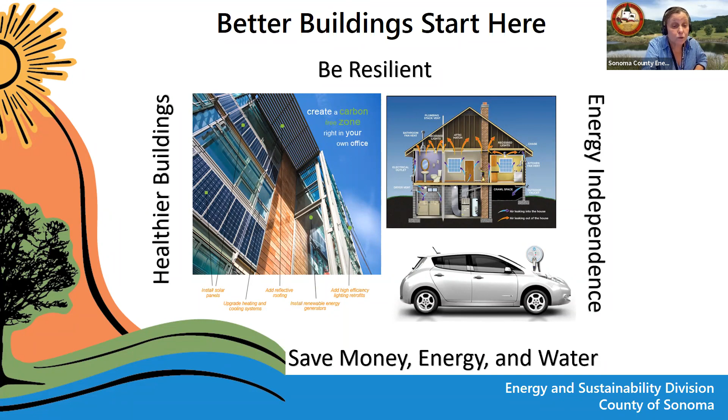We assist county residents through a variety of services and programs. We work with cities, towns, special districts, and businesses and residents to increase energy efficiency and resilience in their buildings through energy and resiliency retrofit project planning, rebates, and financing.

We offer the county's PACE financing program to property owners for energy, water, solar, battery backup, wildfire safety, and seismic strengthening improvements. We offer no-cost consultation services where we provide impartial information to educate community members so they can make informed decisions related to building improvements. And we provide project planning services to help identify resources such as incentives, rebates, and financing to get projects done. We host numerous workshops and trainings for the community and contractors for workforce development, and we also partner with a variety of agencies to offer programs and services to the community.

Today we're going to talk about actions that property owners can take to reduce the vulnerability of buildings during earthquakes and wildfires, with strategies for home hardening and seismic strengthening.

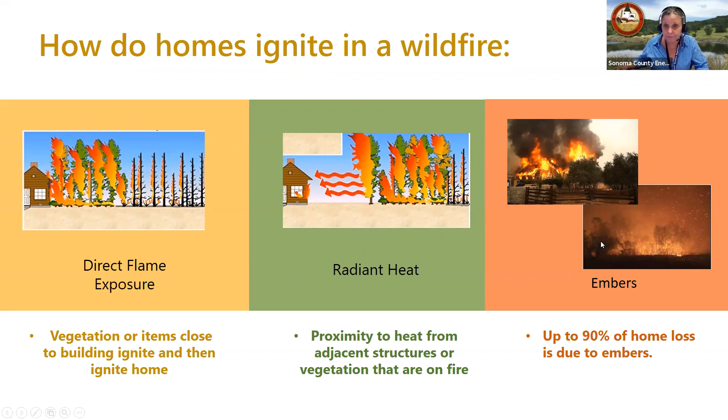Some of the ways that we can harden the home and create a safer environment and protect our homes: first, we want to look at vulnerabilities on the structure itself and harden the structure to prevent ignition. We want to look at fuels within 100 feet surrounding the home and create defensible space. And then we want to really pay attention to weather. It's important to avoid mowing or doing yard work when there are red flag warnings or high wind and high temperature advisories. Always avoid mowing after 10 a.m., or never on a hot and windy day.

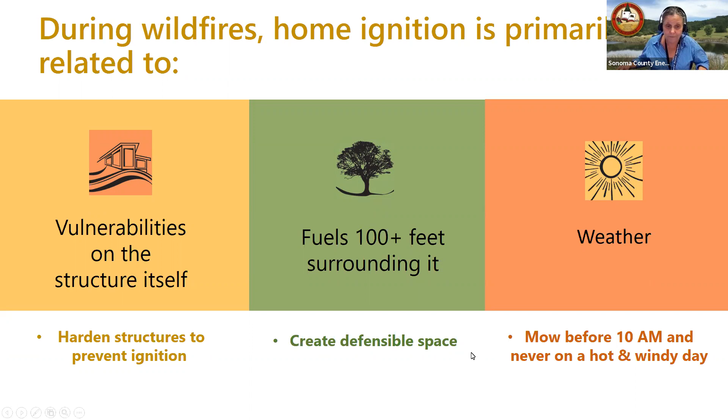This image is one of many from wildfire home retrofit guides showing the critical ember-resistant zone closest to the structure. In this guide, it's referred to as zone 0. Other guides refer to this as zone 1, but I like the zone 0 reference because it shows that it's the most critical area, and the area we have the most control over. So in this area, we want to reduce the vulnerability of the home by creating a zone of ember-resistant materials around the home.

We want to harden the structure. Hardscape is commonly used in this zone, and the zone includes areas under and around attached decks. We want to keep this area clear of any wood piles, wood mulch, and flammable vegetation and stuff. Stuff is a really important consideration—anything flammable in this zone is not recommended, particularly during red flag warnings and high temperature events. This is when you really want to consider clearing these combustible items out of this zone 0.

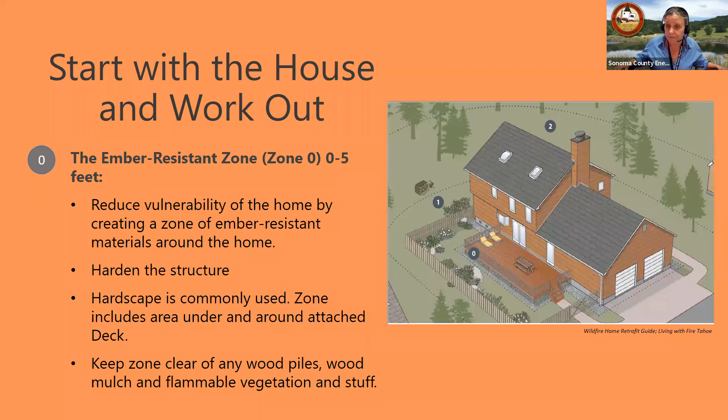Here is a list of high priority areas to focus on for home hardening. Because embers are the primary source of ignition during a wildfire for homes, our priority is to focus on horizontal surfaces and areas prone to accumulation of combustible debris. These areas include the roof and roof edge, vents, vegetation and defensible space, windows and doors, decks, patios and porches, and siding.

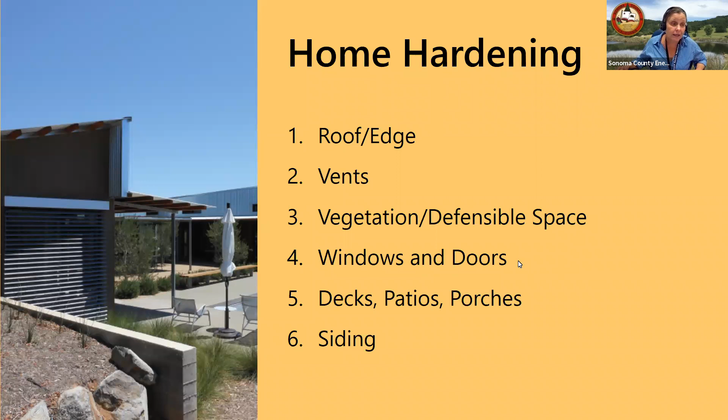The first area we're going to talk about is home hardening at the roof. The roof covering and edge are the most vulnerable part of the home. Because of its large flat surface, the roof has the most severe exposure to wildfire embers, and it's the area most prone to accumulation of combustible debris. In this image, you can see where the horizontal or sloped plane meets the vertical siding—there's combustible siding, whether or not the roof surface is fire-resistant, and leaf debris and leaf litter accumulating next to the siding. That siding looks like wood, combustible siding. This can be a real problem, a real vulnerable area during a wildfire event, particularly because of flying embers.

The important point here is it doesn't always take a major retrofit to harden your home. All of this combustible debris is something we can take care of on an ongoing basis. It generally takes climbing on a ladder, but it's really important to take care of these no-cost, low-hanging fruit opportunities.

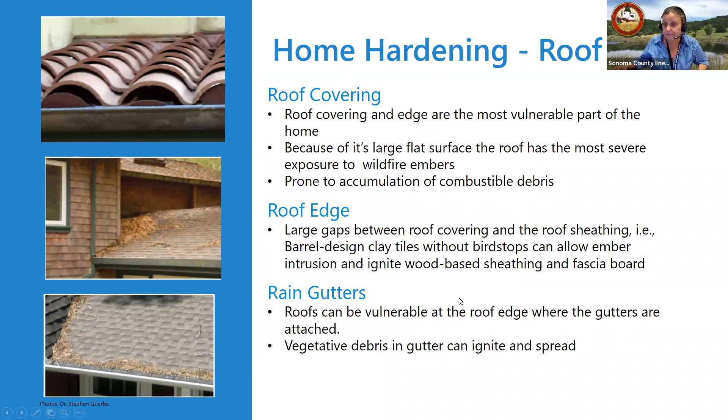So how we can reduce the vulnerability of roofs: number one, remove vegetative debris from the roof, inspect and maintain and replace roofs in poor condition, and replace wood shake or older shingle roofs with Class A roofing. A Class A roof is a roof surface designed to withstand a burning box of wood for 1 hour before burning through. That's what the Class A distinction represents.

Some examples of Class A roofing include asphalt fiberglass composition shingles, clay tiles, cementitious tiles, and metal roofing when it is in a system that has the proper underlayment and ridge caps, which must be installed to avoid fuel accumulation.

It's also important to block openings if there's a space between the roofing material and the roof deck, and inspect the roof edge to see that the metal drip edge is installed to cover the plywood roof deck edge. You can visually inspect this. It's required for new construction, but older homes can often be missing this metal drip edge on the roof surface, so it's something to take a look at—that's a vulnerable area.

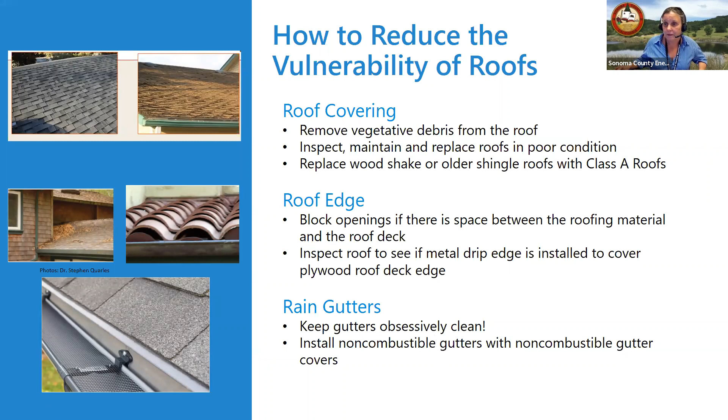The next area we're going to talk about is vents: under eave, attic, and foundation vents. Open eave construction is very vulnerable with or without vents, illustrated in the top left image, where flying embers can get caught underneath that area and cause issues.

1/4-inch vent screens are very common, and embers large enough to pass through a 1/4-inch screen can ignite fine fuels. Often folks store things in their attic and sometimes in their crawl space, which can make your home more vulnerable—that's something to pay attention to.

Gable end vents are more vulnerable to wind-blown embers—an example is the top right image. Foundation or crawl space vents are also vulnerable to ember intrusion. You can see the lower image of a crawl space vent with combustible debris right below it, which can be very problematic. That's an area to pay attention to.

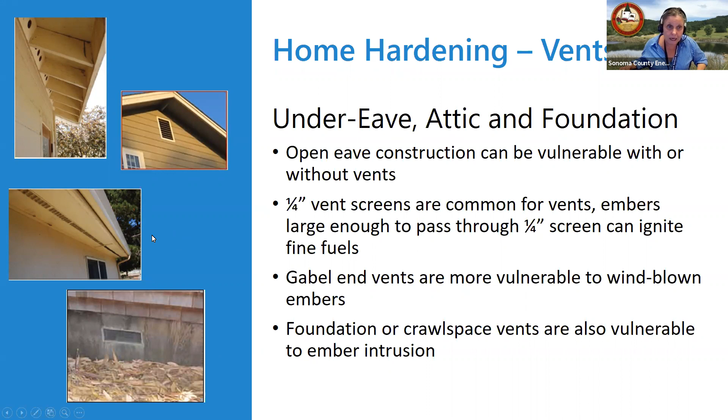Here are some ways we can reduce the vulnerability of vents in our home. We can opt for soffitted eave design for under eave inlet vents, looking at enclosed soffitted eaves. Install 1/16 inch to 1/8 inch mesh over vents to help prevent larger embers from intruding. You want to pay attention to the airflow required in those areas—leave enough net free air area in the grills for moisture mitigation in crawl spaces and attics, but definitely look at reducing the size of the mesh over your vents.

Install ember resistant gable end vents, and invest in ember and flame resistant wildland urban interface rated vents. The state fire marshal has a website of materials where they list WUI rated vents, and that link is included in the slide with wildfire safety resources—a good reference tool for finding vents that qualify under this category.

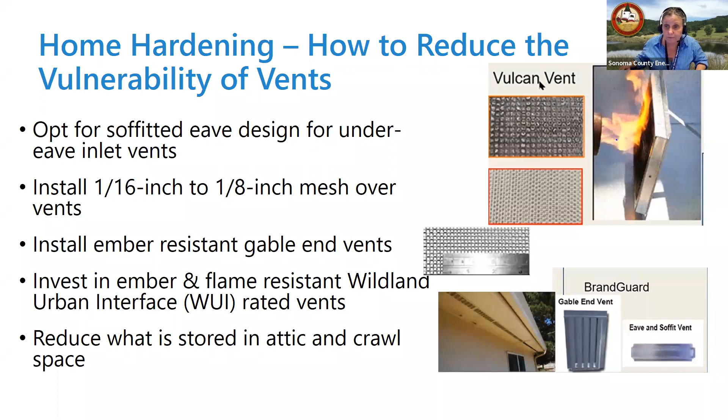So, how to reduce the vulnerability in the 0 to 5 foot zone—this is the area in close proximity to your home, that zone 0 we were talking about. One issue is combustible stuff, including deck furniture, wooden ladders, brooms, and wooden tools. You can see one image on the right-hand side has a pitchfork and what used to be a broom that caught fire when an ember landed on it. Luckily this home survived, but you can see that was actually a problem.

Any kind of combustible wood materials should be moved out of this critical zone to eliminate this vulnerability. You can see all sorts of examples of combustible stuff, right? Wood piles, those coir rug entry mats, and then there's a dog coming out of a pet door. That can be a problem when the wind is blowing.

You can have problems with ember intrusion, but it's also really important to think about if you're evacuated or there's red flag warnings, to close up those pet doors because they can flap open and be a problem. Wood piles should be stored 30 feet away from buildings, or stored inside, or covered with a non-flammable tarp.

Propane tanks ideally should be 30 feet away from the home with a 10-foot non-combustible zone around the tank, or the tank can be enclosed in a non-combustible enclosure, for example like CMU block or something like that. But it's really something to pay attention to.

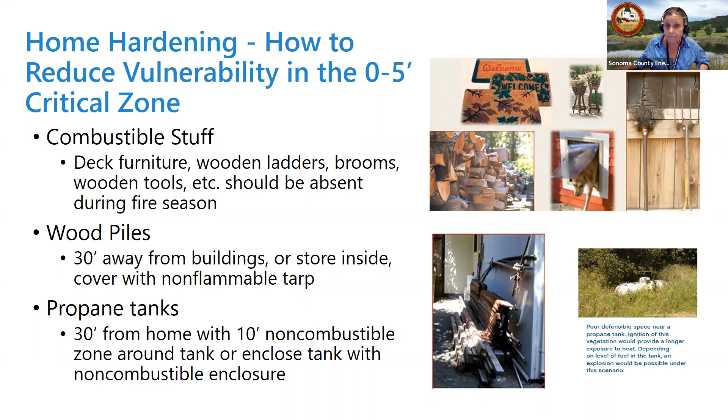So in this zone, we want to remove woody plants. And if you're going to plant at all, think about fire resistant plant materials. We have also some information about plant selection in this area in our slides towards the end. And remove vegetation within 5 feet of windows and glass doors.

They represent a vulnerability in the home's surface, so having flammable vegetation in this zone is a bad idea. Also use non-combustible mulch in this area. We want to avoid combustible wood, bark, and rubber mulch products.

Rubber is a real problematic material if it ignites. It may take a little longer to ignite, but once it does, it puts off a lot of really noxious fumes, makes it very difficult for firefighters to be in proximity to it when it's ignited. And it's very difficult to extinguish the fire with rubber mulch, so it's not a good idea in zone 0.

Don't install small pieces of bark or very combustible gorilla hair mulch in this zone. And in walkways and hardscaping areas around the home, use pavers, rock mulch, or pea gravel.

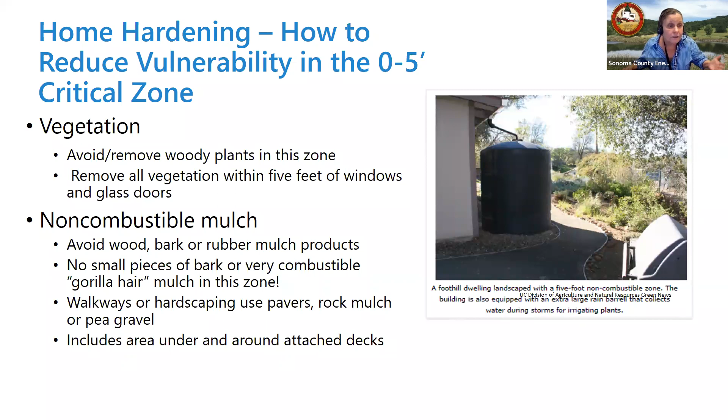So I thought this was a really good example of how to manage that area in close proximity to the home. This area includes, as I mentioned before, areas under and around attached decks, so gravel under and around attached decks, or some other type of non-combustible material, is a really good idea.

Here we've got another element in the 0 to 5 foot critical zone: fences. Attached fences that come right up to the home. A really good practice is to replace the combustible portion of your fence that meets the home, that actually leads up to the home, with a non-combustible fence. Here we want a minimum of a 5 to 10 foot long non-combustible section.

A horrible example is this top picture, that scary example that shows the fire wicking along the wooden fence and then actually reaching the home. But really good examples on the bottom, where a metal fence is acting as a fire break between that combustible wooden fence - very common to have wooden fences - but it can really help mitigate that fire spread.

And here again, you want to remove vegetative debris. We want to diligently remove vegetative debris anywhere around our homes - that's a really important practice. But you want to look at the base of your combustible fence and also keep that clear of combustible debris.

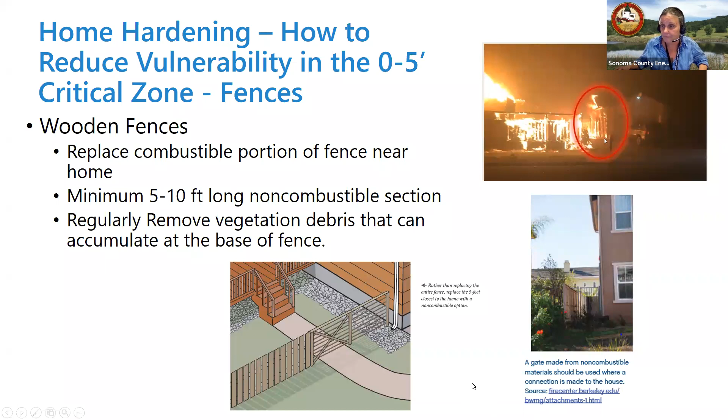Another area we're going to talk about is windows and doors. Windows and glass doors can be vulnerable if the framing material ignites, and if glass breaks or falls out, allowing embers or flames to enter the home. The most vulnerable part of the window is the glass, and single pane windows are highly vulnerable to breaking when exposed to wildfire conditions.

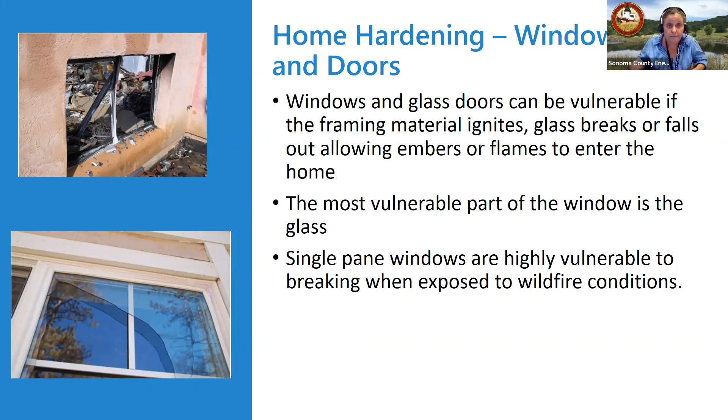So here we can address the vulnerability of windows and doors. One thing we can do that doesn't take a financial investment is to close windows and doors during wildfire events. This is really important for preventing ember intrusion, but also for smoke intrusion too. So keep your doors and windows closed during wildfire events.

Remove or prune flammable plants and shrubs near windows, and replace single pane windows with dual pane windows that have at least one pane of tempered glass. That's a wildland urban interface requirement if you're in one of the WUI zones, but it's a best practice for anyone in areas prone to wildfires.

Better practice, and more and more research is showing, is to actually have two panes of tempered glass in your dual pane assembly. It adds cost to the project, but there are many areas in the home where it's already required to have tempered glass just for safety issues. Best practice is two panes of tempered glass for windows and doors.

Tempered glass is 3 to 4 times more resistant to heat exposure than typical annealed glass. Annealed glass will fail at 234 degrees Fahrenheit versus tempered glass, which can withstand up to 665 degrees Fahrenheit. Metal window screens can help improve the performance of glass exposed to radiant heat, and window covers and non-combustible shutters are actually a solution also.

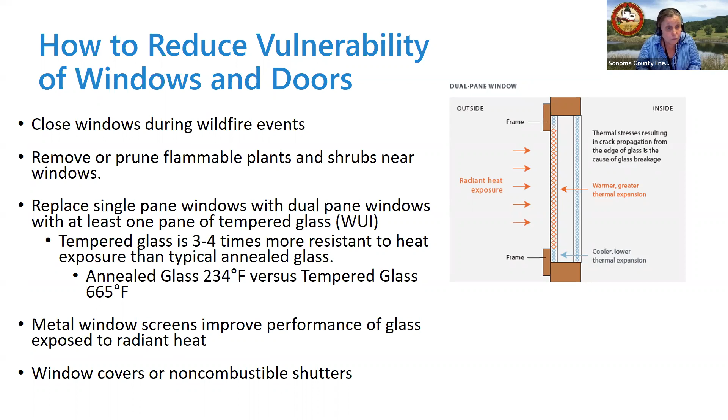So here we're going to talk about decks, patios, and porches. This is in that zone 0, attached decks and patios and porches. If attached decks ignite, the home can be exposed to flames and radiant heat.

Embers can also directly ignite deck boards. Combustible materials under and on top of decks increase vulnerability. The most common decking materials are combustible, including redwood and cedar. Decks that overhang slopes are more vulnerable to flames from downslope vegetation.

Just got a couple of scary pictures here: one of a deck that ignited, likely from embers falling on the deck, and then a bad example—or a very good example of what not to do—of what not to store under your deck: a bunch of dry lumber. That definitely increases vulnerability.

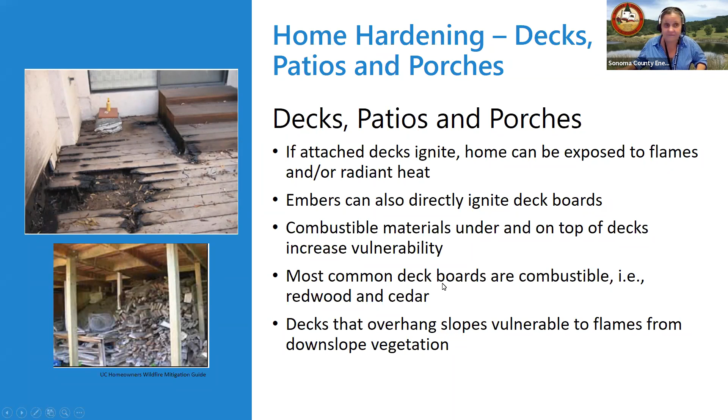So some of the things you can do to reduce the vulnerability of decks—and we're going to focus on decks here, but this also applies to any attached porches or combustible horizontal surfaces attached to the home—you want to create an ember resistant zone under and around decks.

If your deck's in pretty good shape and you don't have the resources to replace it with a non-combustible deck, you could replace the deck boards within the first few feet next to the house with non-combustible material on the combustible deck. You can see a picture of a ledger board that's metal meeting the house, and there's also metal flashing on the board that attaches the deck to the house. So those are ways to do a smaller scale retrofit that can really help.

It's a fire stop kind of idea, the same as the fencing, where you've got a combustible material but you can put a non-combustible material to block that fire from wicking right up to the home's siding, buying you a little bit of time.

You can use non-combustible or ignition-resistant, higher density decking products for new and replacement decks. You can refer to the California Fire Marshal Materials listing link in the slide for examples of high density, ignition resistant, or non-combustible decking materials. I mentioned installing metal flashing between the ledger board and the joist to protect combustible siding. You can always remove debris.

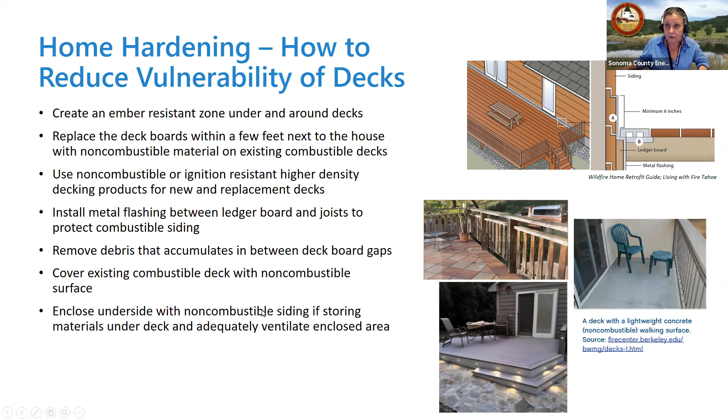Siding is another area that can be vulnerable. It's vulnerable to extended exposure to flames and radiant heat. Nearby structures can dramatically increase a home's vulnerability. Gaps in combustible siding are very vulnerable to hot embers lodging and burning. Partly decayed wood is more vulnerable, and accumulated debris on horizontal surfaces adjacent to vertical siding increases the risk of ignition from embers.

Pretty good examples, I think they're very clear. Here's the top picture showing accumulated debris that ignited from windblown embers and started spreading to the siding. There's a picture of a wildfire testing operation showing a small wildfire igniting combustible siding versus non-combustible siding.

Some older aged wood siding that's very vulnerable, with debris accumulating where the horizontal plane meets the vertical plane. We also have an example of combustible siding meeting right at the floor or ground level—that becomes very vulnerable when it's combustible.

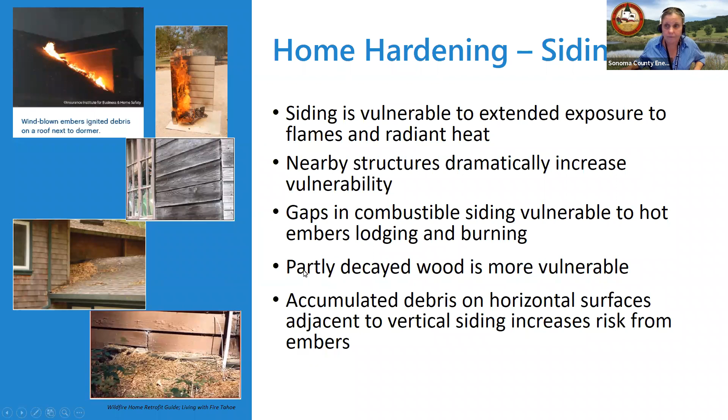Some ways we can reduce vulnerability: use non-combustible siding like 3-coat stucco or cement board. Replace dry rot, seal joints and cracks greater than 1/16 of an inch, and maintain at least 6 inches of vertical non-combustible zone from the ground to where the siding begins. You can see the image at the bottom—that concrete foundation gives another fire break between the ground surface and the siding.

There's gravel ground cover next to the 6-inch concrete foundation, so it all acts as a fire break. You could potentially replace just the lower board, or cover it with a non-combustible material like cement board, to give you a bit of a fire break and keep the ground area adjacent to the home clear of combustible debris.

If you're not in a position to replace all of your siding, and you've got complex roof assemblies like shown in that middle image, where the roof plane changes and it's hard to reach that area and keep combustible debris away, it's a candidate for partial siding replacement, which would be much less expensive than doing the whole house. So you could identify which areas are very vulnerable and consider a partial replacement.

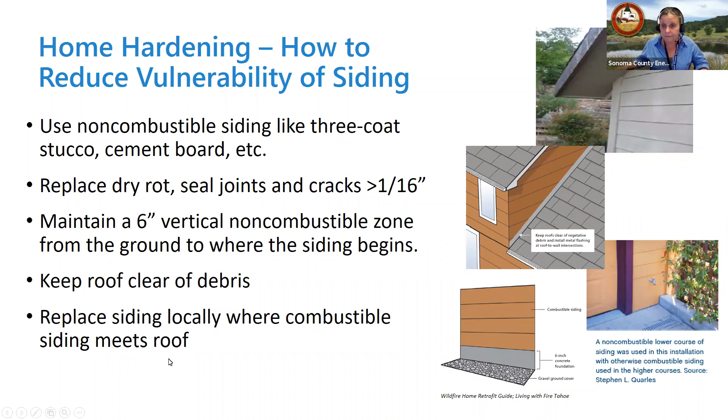There are co-benefits to home hardening that address energy efficiency, indoor air quality, and comfort issues—high performance windows, air sealing of your home where you either do it yourself or hire someone to caulk and seal all the cracks and penetrations in the building envelope. That's very helpful for mitigating ember intrusion, but also for indoor air quality during wildfire events.

If you're deciding to re-side your home, it's a great opportunity to add insulation to uninsulated walls. If you're going to re-roof and you have mechanical air conditioning, it's a great option to look at cool roofing materials—lighter colored roofing materials, not the white coating you see on commercial roofs, but attractive options for cool roofing. So in addition to a Class A roof, you could choose a cool roof.

If you're installing a high efficiency heating, ventilation, and air conditioning system, they now come with really great filtration. That's another hardening strategy, but really for indoor air quality and comfort—you can keep your windows closed, like with a good heat pump system, run your HVAC system to recirculate and filter the air inside, which really helps you ride out those smoke events. And if you're going to purchase air purifiers, make sure they're Energy Star.

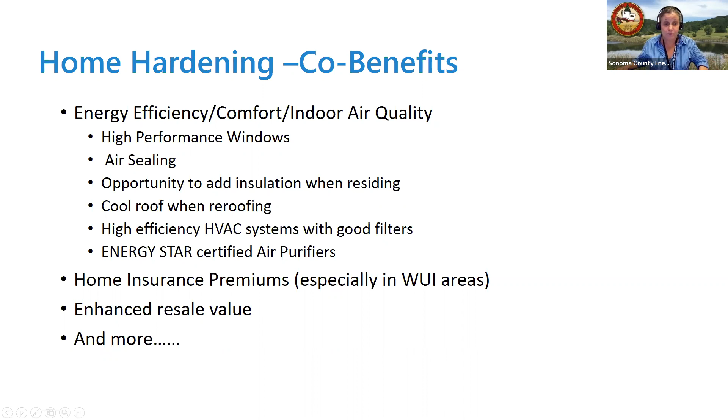There are more benefits. So we're going to roll into earthquake safety, but I wondered, Patricia, is there anything we need to address at this time as far as in the chat?

Okay, they're asking: we have a carport that is open on two sides. Is the county going to allow us to enclose this and make it ember proof without a huge cost in permit fees? They're stating it's a wooden structure. My advice when you have a question about county and building department regulations, if you want to enclose an open carport, that will likely trigger a permit with the building department. So I would contact your local building department - I don't know what jurisdiction you're in. If you're in the unincorporated area of the county, contact Permit Sonoma. If you're in one of the city jurisdictions, contact your building department and talk to them about what it would entail. They're very helpful, so reach out to them. Many things trigger a permit, so it's really worth checking in with your building department.

Now we're going to talk about seismic strengthening and earthquake safety. Homes built before 1980, especially those with raised floor or crawl spaces, are very vulnerable to earthquake damage. Also, unreinforced masonry chimneys are vulnerable components in a home.

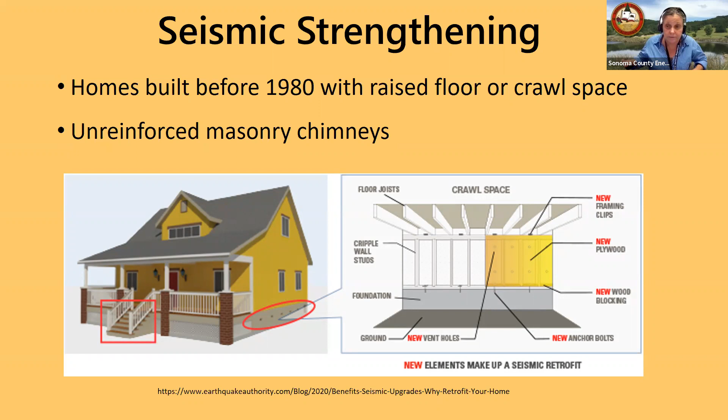A stem wall house has a wood framed first floor resting directly on a raised concrete perimeter foundation. Generally, the stem wall retrofit for an earthquake upgrade, a seismic strengthening upgrade, consists of bolting the house sill plates to the foundation using foundation plates. It's a pretty straightforward brace and bolt upgrade - the least expensive type, just requiring foundation bolts.

This is one situation where you can really perform some good upgrades and make your home less vulnerable to earthquakes. The issue is when the home is not securely connected to the foundation, it can actually slide off the foundation during an earthquake. So this is the most straightforward seismic upgrade.

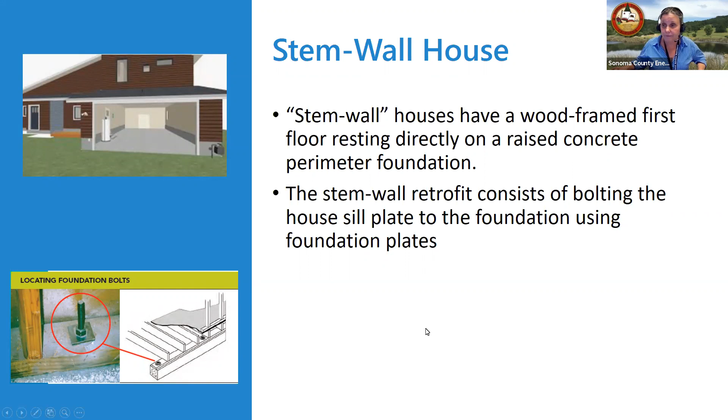Here we have another stem wall condition called a cripple wall, where there are taller walls. If your home has a crawl space with unbraced walls, these crawl space or cripple walls could collapse during an earthquake, which in turn may cause your entire home to collapse or lead to major damage to the structure, as well as fire and water line breaks and injuries.

With a cripple wall condition, we'd be looking at adequate bracing, which is plywood or diagonal sheathing on exterior walls. You can see examples of where those plywood sheathing panels are placed, right over the cripple walls. Adequate bracing is with those plywood or diagonal sheathing components installed - without the plywood, the bracing is not adequate.

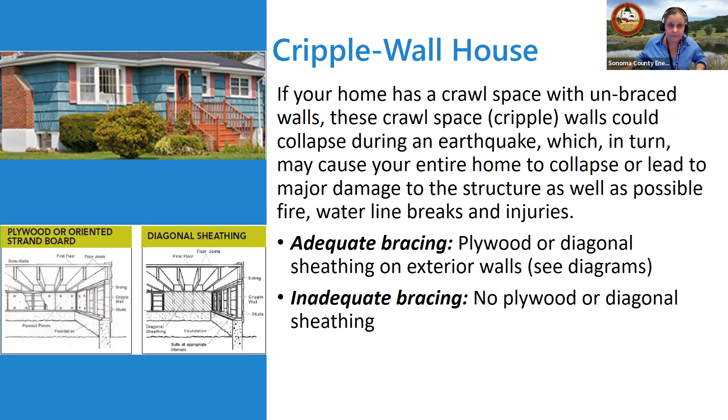Another example of a home that is very vulnerable to earthquake damage is a post and pier home. If your home sits on large wooden posts that rest on unconnected concrete piers, the posts may not be braced properly, and during an earthquake the post could fail and your home can shift or collapse. Adequate bracing includes installing a continuous foundation around the perimeter edges of the home, consisting of either reinforced concrete or reinforced masonry. This is a more expensive, engineered solution, but can really help decrease the vulnerability of a post and pier house during an earthquake.

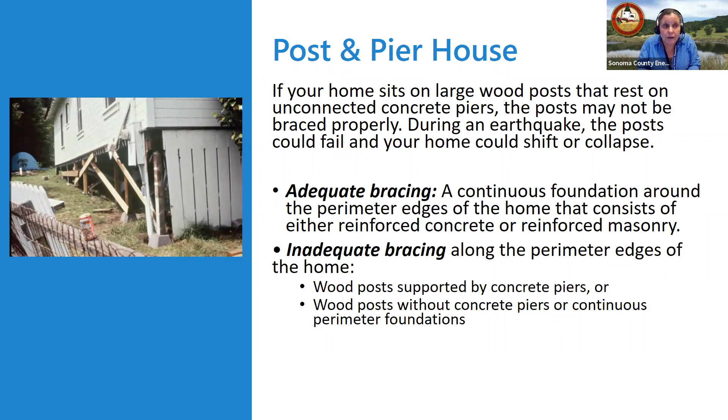Another condition is a soft story house. If your home has a room above the garage, that is considered a soft story condition. You need to ensure that the narrow walls on either side of the garage doorway are strong enough to withstand earthquake shaking. Without adequate support, these walls could collapse, causing serious damage and injuries. We saw a lot of examples of that happening in the Marina during previous earthquakes in San Francisco. So it's something to really pay attention to.

You want to definitely consider bracing your garage walls to be sure they can structurally hold the home during an earthquake. If the garage has been built or strengthened to support a second story, you'll see plywood bracing on the walls and metal straps. If you do not know what to look for, consult a licensed engineer or architect. This is definitely an engineered solution, but something to consider if your home has this condition.

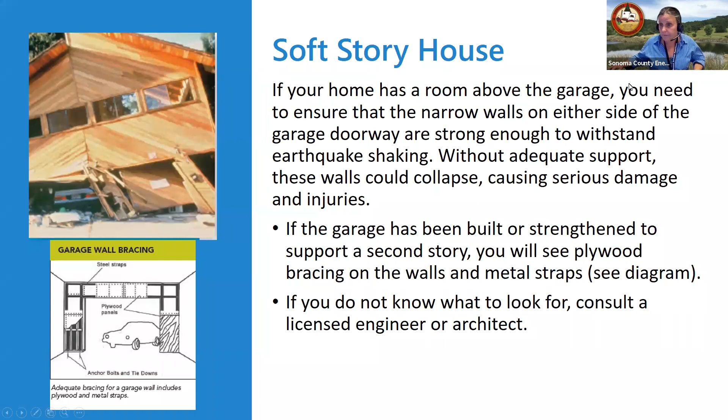Another area to take a look at are masonry chimneys. In the 2014 Napa earthquake, about half of the residential buildings that were damaged, it was due to unreinforced brick chimneys. So here's something else to consider.

To keep the bricks from falling through the roof during an earthquake, here are some reinforcement options. Add layers of plywood on the roof around the chimney. Remove the upper part of the chimney that can twist and turn during shaking and replace it with metal. Add diagonal steel bracing to the chimney.

More expensive retrofits involve removing the chimney completely or rebuilding it. If the homeowner doesn't need the chimney to be functional, retrofitting could be as simple as placing a steel tube down the structure and filling it with concrete.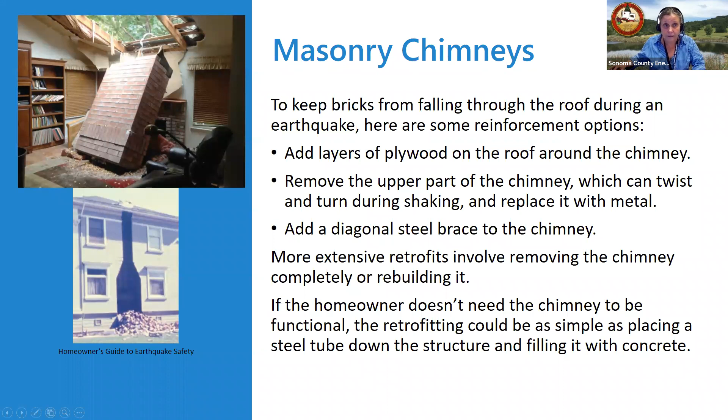So that's kind of an overview of seismic strengthening. We have a lot of great resources here on the next slide for seismic strengthening that I wanted to leave you with, because there's so much good information out there.